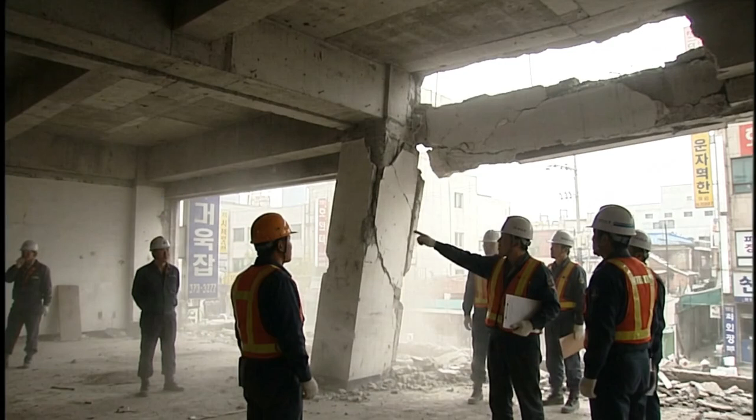Inside, the fifth floor ceiling is cracking. Civil engineers have inspected the damage. They have warned that the building is at risk of collapse. Management has closed the upper floor, but the store itself remains open.

At 5:55 p.m., the north wing collapses. In approximately 20 seconds, 5 stories fall to basement level. 502 people are killed. 937 are injured. 6 remain missing. This is not the story of one defective column.

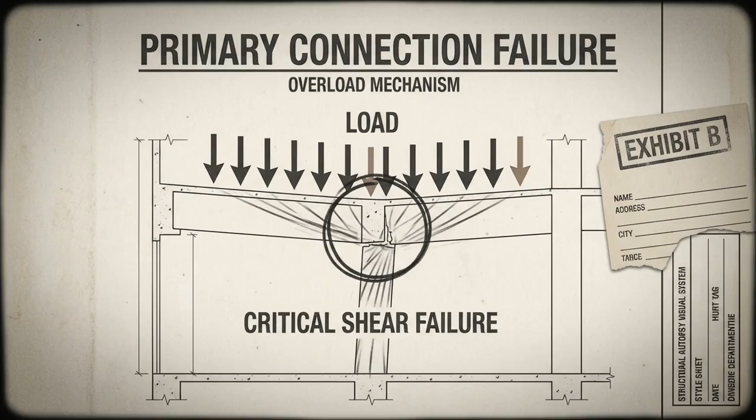It is the story of a building changed again and again, until one connection could no longer carry what had been placed above it. This is the structural autopsy of the Sampoong department store.

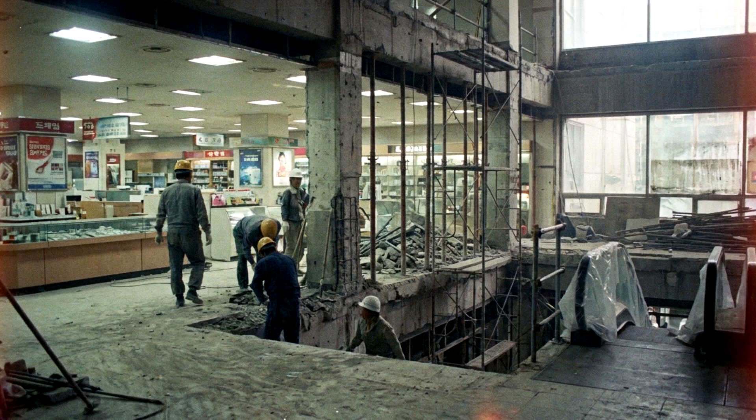Construction begins in 1987. The original plan is for a 4-story residential building. Its columns, slabs, loads, and internal layout are calculated for that purpose. Then the owner changes the project into a department store. Retail space demands larger open floors. Walls move, circulation changes. The load carried through the building changes with them.

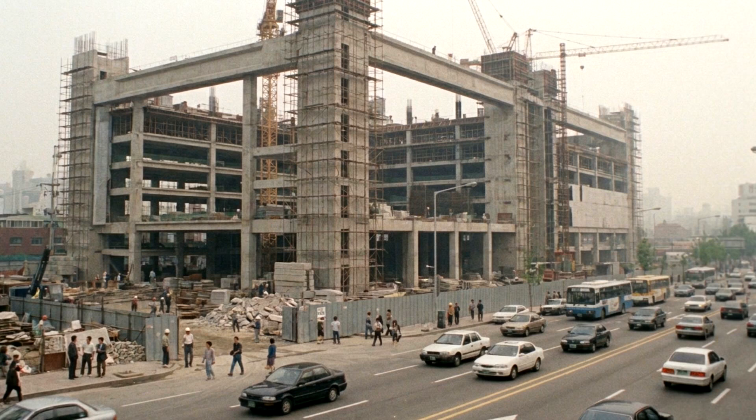The original contractor refuses to carry out proposed structural modifications because of safety concerns. The contractor is dismissed. Construction continues under the owner's own company. By the time Sampoong opens, the building no longer matches the structure its original engineers intended to build.

To shoppers, none of this is visible. The store becomes a commercial success, attracting an estimated 40,000 visitors a day during its 5 years in service. But the building beneath them is not simply the original design with different signs above the doors. It is a different structural proposition.

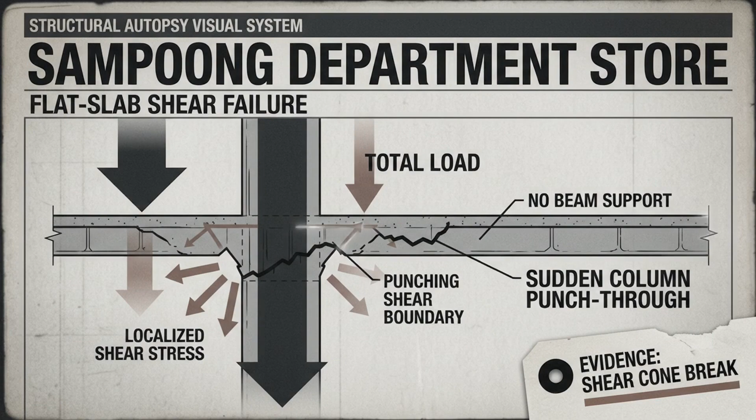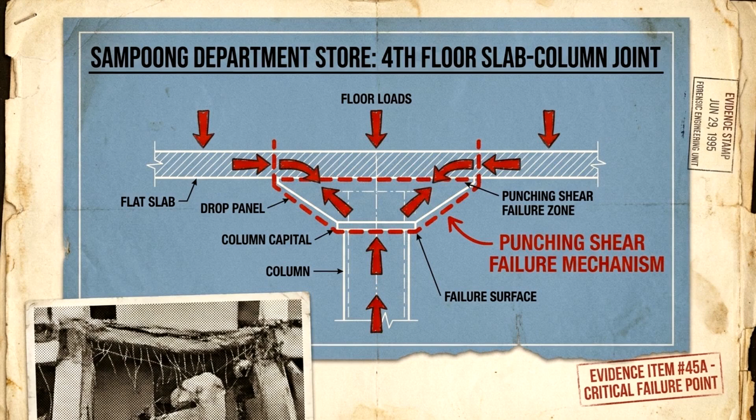Sampoong uses flat slab construction. There are no deep beams beneath each floor. Instead, the reinforced concrete slabs rest directly on columns. The system creates the wide, open spaces a department store wants, but it also makes the geometry around every slab column connection important. The inquiry would later compare what the calculations assumed with what had actually been built.

The columns supporting the 5th floor and roof were calculated at 800 millimeters in diameter. They measured only 600. The effective slab depth in critical regions was specified at 410 millimeters. It measured 360. The concrete was specified at 21 megapascals. Tests found strength closer to 18. Each difference removed part of the intended margin.

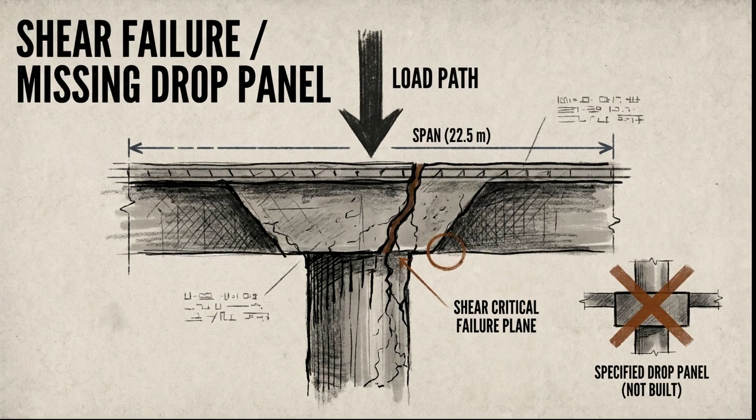And at column lines 4 and E, investigators found something else. A drop panel, a thickened area of concrete intended around the column, had not been constructed. Where the slab was intended to be 450 millimeters thick, it was only 300. The building was not carrying one error, it was carrying several.

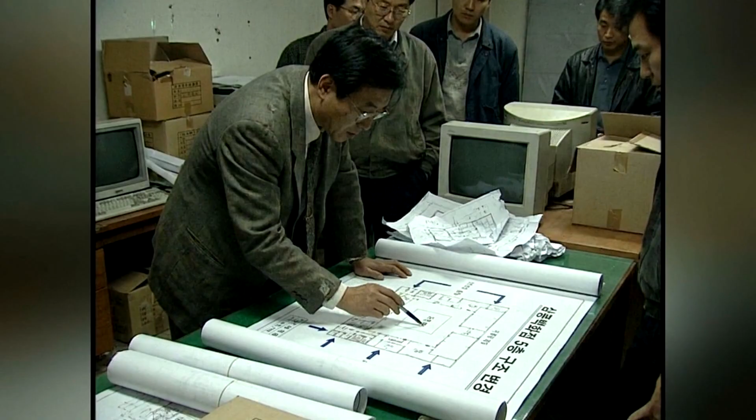The 5th floor had originally been designated as a roller skating rink. It became a restaurant level instead. Walls and false floors were added, but the structural system was not redesigned for the change. The inquiry calculated that the permanent load on the 5th floor increased by 35%.

Above it, the roof also carried more weight than the calculations assumed. The lightweight roof topping had been calculated at 1.9 kilopascals. The installed topping imposed about 4. Then there was the cooling tower.

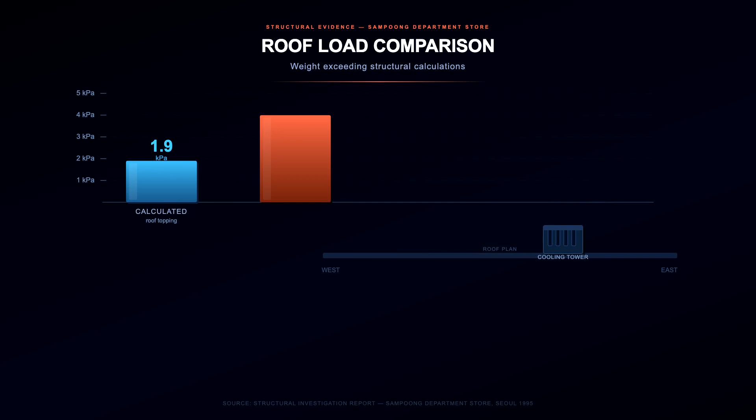After complaints from residents on the east side, it was moved toward the west. It was not separated into smaller units for the move. The inquiry found that moving it damaged the roof slab. Its weight also introduced unbalanced forces at the slab column connections below.

By then, the building had changed in 3 different ways. Its structural dimensions were smaller than the calculations assumed. Its materials and slab depth provided less capacity, and its upper floors and roof carried more permanent load.

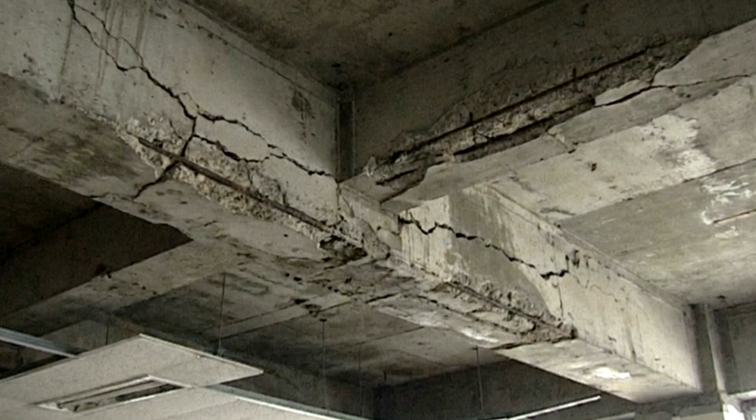Still, the building remained standing for almost 5 years. That survival could look like proof that the changes were acceptable. It was not. In April 1995, cracks appear in the 5th floor ceiling. They do not disappear. By the morning of June 29th, the cracking has increased dramatically. Management closes the top floor.

The air conditioning is shut down. Management does not evacuate the store. The unusually high customer count and the revenue that would be lost by closing form part of that decision. Executives take the precaution of leaving. Customers and staff remain inside.

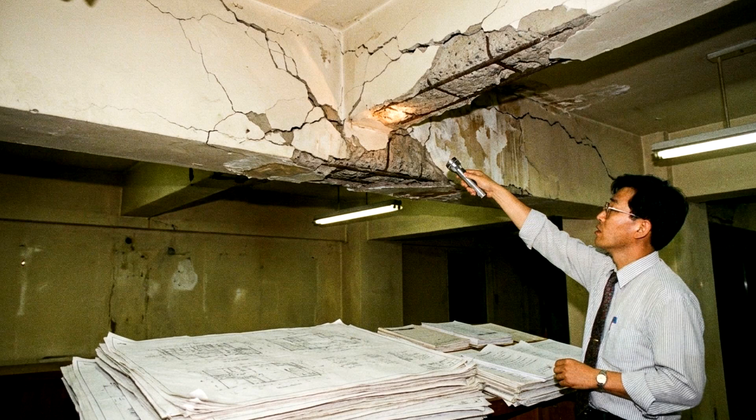The physical warning has now become a management decision. The cracks show that the structure is in distress. The inspection gives that distress meaning. The building is still occupied because the warning is not acted upon. At 5:55 p.m., the failure begins.

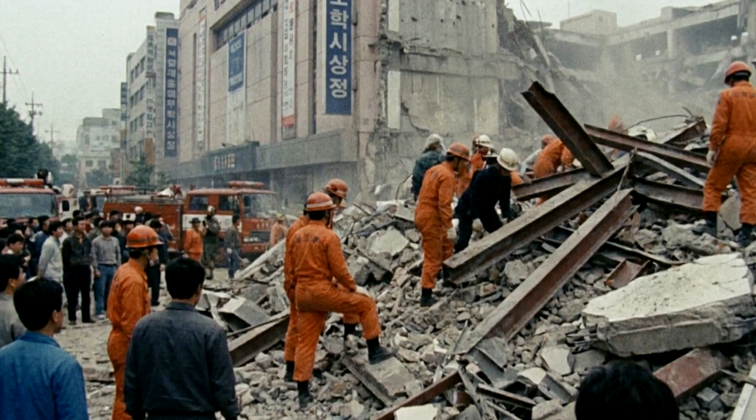The Committee of Inquiry traces its starting point to the 5th floor restaurant level at column 5E. Not every column fails at once. One critical slab column connection fails first. Only after the collapse does the engineering mechanism receive its name, punching shear.

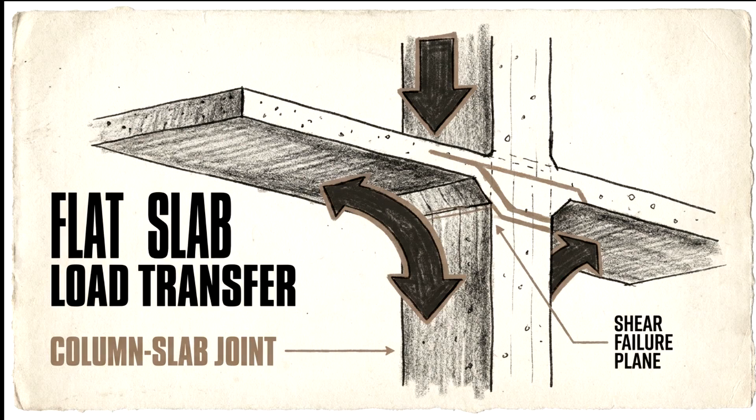In a flat slab, the weight of the floor is transferred directly into each supporting column. That force is concentrated around the column's perimeter. Imagine pressing a narrow support through a sheet. The sheet does not need to split from one edge to the other. It can break locally around the point carrying the force.

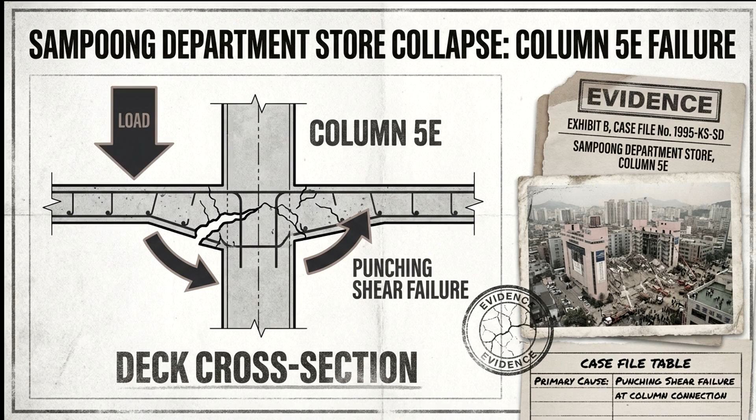At column 5E, the concrete slab fails around the connection. The support provided at that point is lost. The load does not disappear. It is forced into the surrounding structure. Connections already carrying reduced margins are asked to accept more.

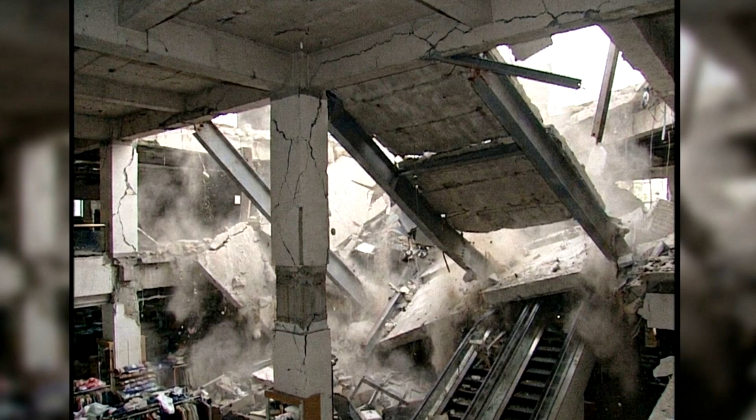Further failures follow. Slabs fall onto the floors below, adding dynamic load to a structure already in collapse. A local failure becomes progressive collapse. The north wing falls to basement level in approximately 20 seconds. When it stops, 502 people are dead, 937 are injured, and 6 are missing. At the time, it is the largest peacetime disaster in South Korean history.

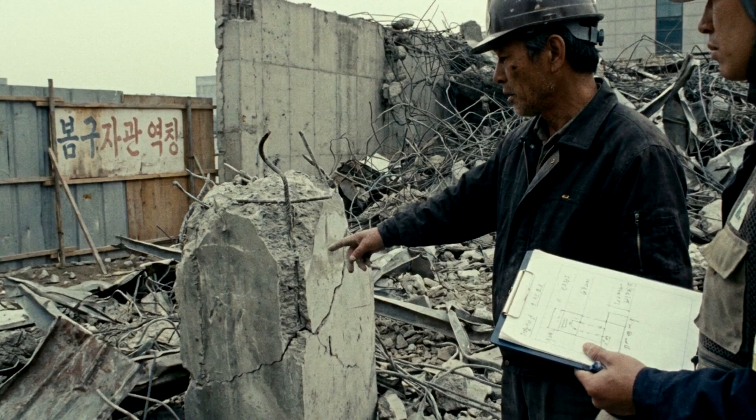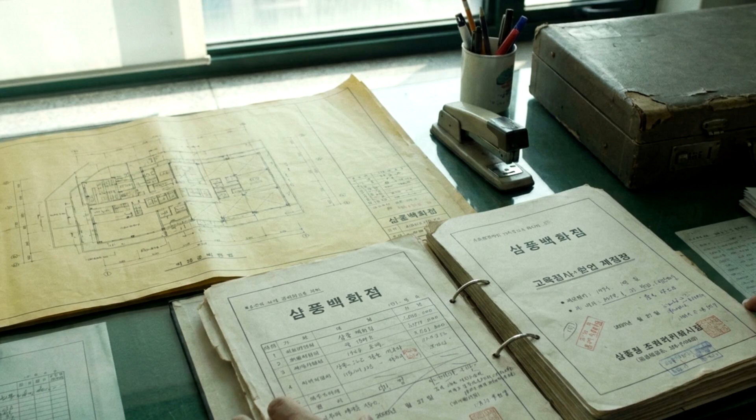The collapse leaves an obvious question. How can a relatively new building fail without an earthquake, extreme weather, or an explosion? Investigators examine the collapse pattern and the ground conditions. They test concrete and reinforcing steel recovered from the site. They review design documents, construction records, and management reports. Then they analyze the structure.

The evidence does not point to one isolated defect. It reveals overlapping failures in design, construction, loading, and management. The columns were smaller than the calculations assumed. The effective slab depth was reduced. The concrete was weaker than specified. A required drop panel was absent.

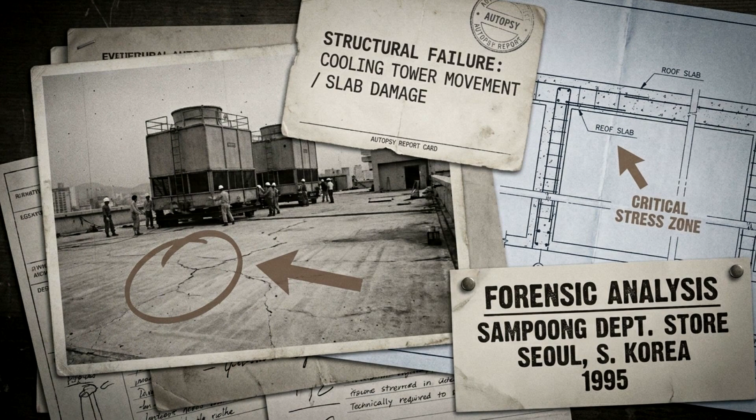The restaurant conversion increased the 5th floor dead load. The roof carried more load than assumed. Moving the cooling tower damaged the slab above the area of failure. And when visible distress became severe, the building was not evacuated. None of those facts replaces the direct mechanism.

The collapse still begins with punching shear at a slab column connection, but the mechanism explains how the building failed. The evidence chain explains why that connection had so little capacity left. Rooftop and cooling equipment imposed greater loads than the calculations assumed. Serious structural distress was identified, but the occupied store was not evacuated.

One local connection failure triggered progressive collapse of the north wing. Sampoong did not fall because concrete suddenly changed its behavior. It fell because the conditions around one critical connection were changed repeatedly.

Less column, less effective slab, weaker concrete, missing drop panel, more load, then visible distress without evacuation. The final failure took approximately 20 seconds. The decisions that prepared it took years.